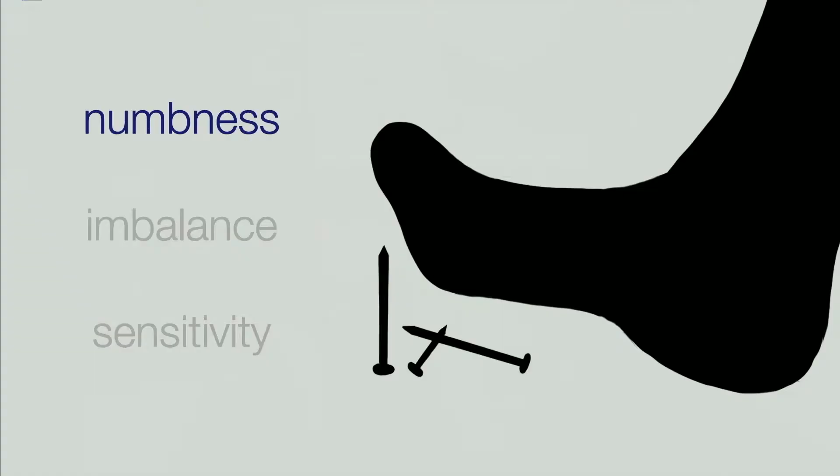Well, for those with peripheral neuropathy, they're having a much different sensation. Peripheral neuropathy is caused by nerve damage in the extremities of the body. Often starting at the tips of your toes, it works its way throughout the foot, often causing numbing, pain, and weakness. Because of this loss of sensation, people with peripheral neuropathy have to be extremely careful, whether it's accidentally stepping on something sharp and leading to infection, to misstepping and causing a fatal fall, and driving puts their lives and the lives of their loved ones in danger.

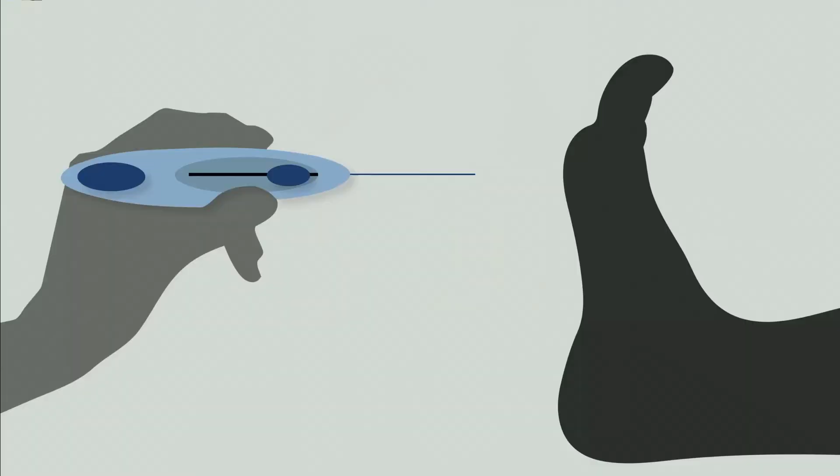We wanted to focus in on a subset of people with peripheral neuropathy, specifically those whose condition results from diabetes. In the United States, 13% of adults are diabetic, and of this group, half of them experience some form of peripheral neuropathy in their lifetime. Thankfully, doctors have a variety of ways to test for peripheral neuropathy, one of which is the Semmes-Weinstein test. This test is done by having the doctor poke different locations on the patient's foot and ask questions, helping the doctor determine how much sensation the patient still has.

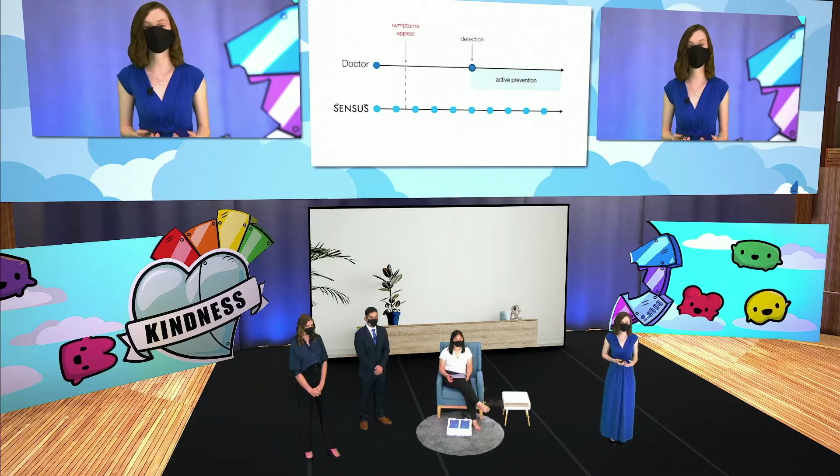But what happens if the symptoms appear much earlier than their next doctor's appointment? By that time, detection is far too late and there's been significant nerve damage. That's why we wanted to design a product that causes early detection and early active prevention. That's why we designed Sensus. Sensus automates the peripheral neuropathy screening process by testing 5 points on a patient's foot. We chose these points strategically because they represent the progression of PN over time. PN starts at the tip of a patient's foot and gradually makes its way down toward their heel.

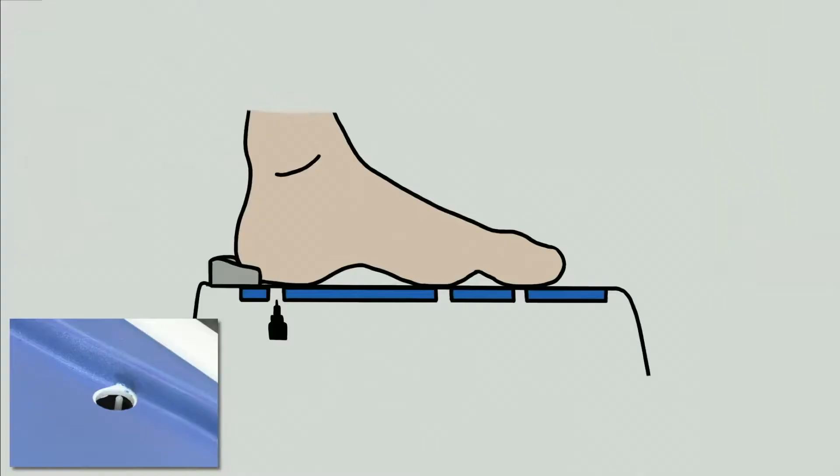Now, let's see Sensus in action. We'll conduct an abbreviated test with Jenny, who is here today representing our user, a diabetic at risk for peripheral neuropathy. Let's get started. Jenny will place her feet on Sensus. Sensus will automatically detect when Jenny's feet are in position, and that grayed out begin button will turn blue. Sensus starts with Jenny's right foot. The filament corresponding to her heel will rise and tap her foot, mirroring the Semmes-Weinstein test. Because Jenny still feels sensation in her right foot, she'll answer yes.

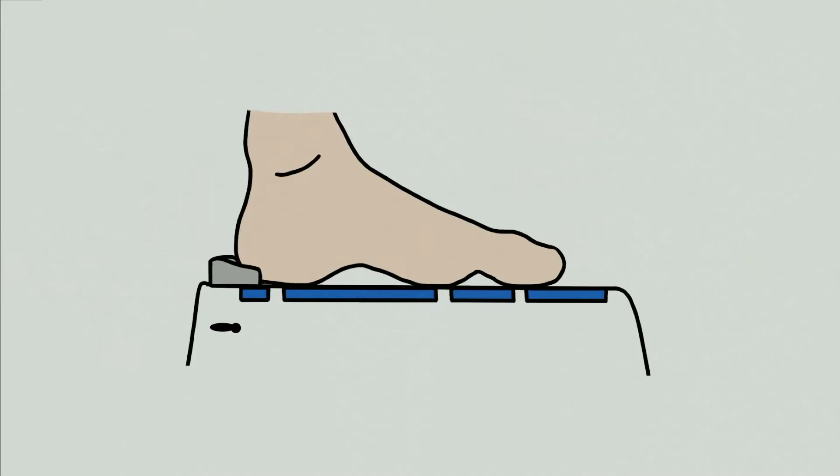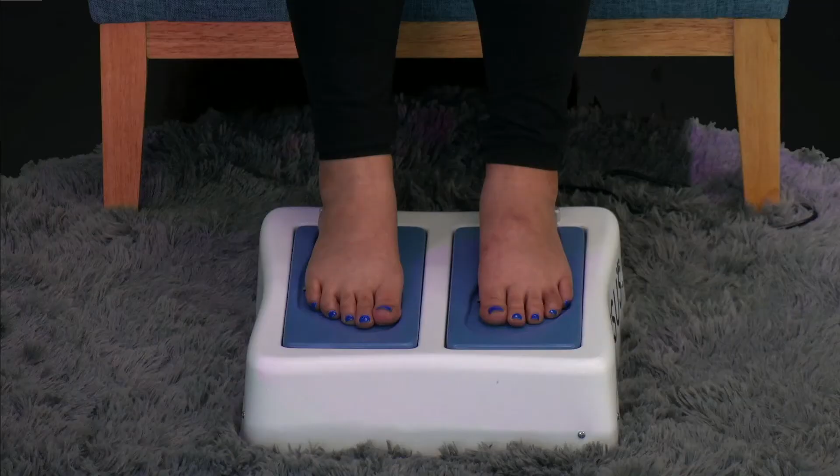Sensus will now repeat the test at the same location, except this time it'll perform a fake test. Fake tests are used by doctors to determine when a patient can and cannot feel a tap on their foot. In our case, a fake test mimics the sound of a real test, except this time it doesn't tap the user's foot. Because Jenny didn't feel a tap during the fake test, she'll answer no. Sensus now moves on to Jenny's left foot, where unfortunately she's experiencing symptoms of PN. Sensus will tap her foot, but this time Jenny won't feel it. She'll answer no.

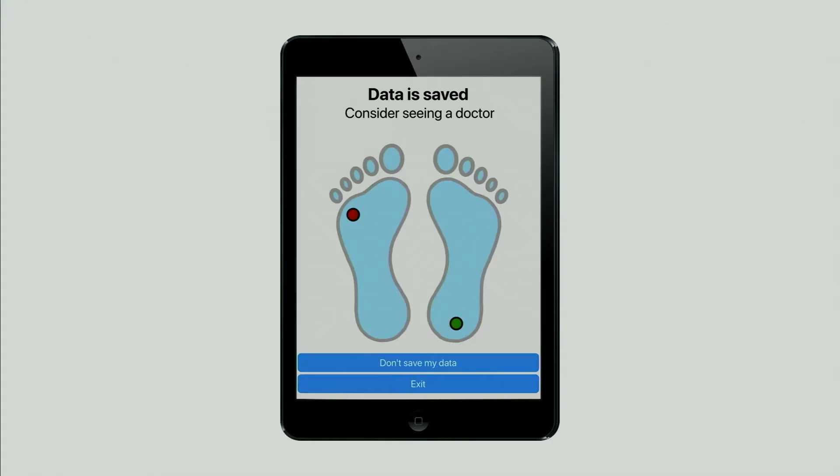At the end of the test, Jenny will see her results. The green dot means that Jenny feels sensation in her right heel, whereas the red dot means that Jenny may have lost sensation in the ball of her left foot. Because Jenny didn't get a perfect score, Sensus recommends that she see a doctor. If Jenny ever wants to see this or a previous test again, she can do so in the app as well. And it's that easy. Thank you, Jenny, for representing our user.

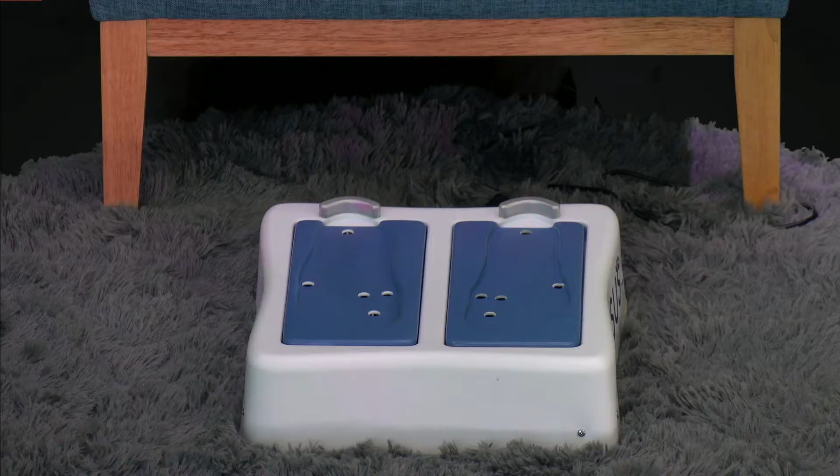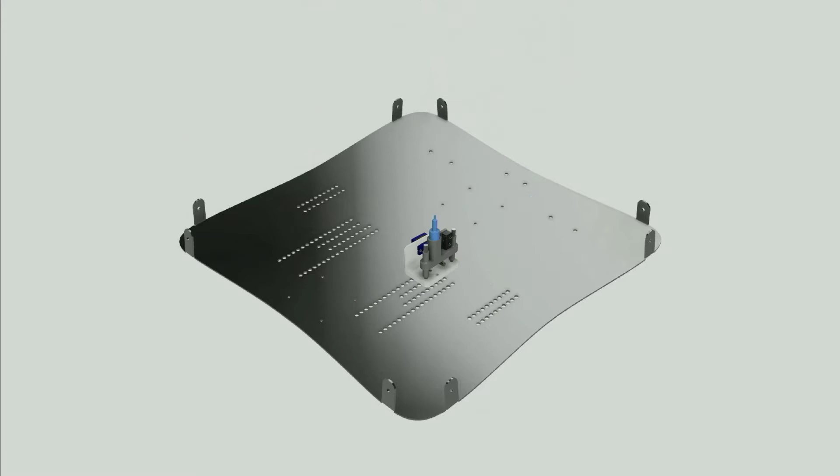When a user begins the test, they position their feet using the metal aligners. A capacitive sensor recognizes the heel and turns Sensus on. This keeps the entire experience on the app, so the user does not have to bend over to turn Sensus on. The customizable foot inserts are interchangeable, so Sensus can be manufactured to fit almost anyone and ensures their feet are tested in the correct points. Let's take a look under the hood. Our base plate has 10 filament modules, with 5 per side, capturing the most pressure-intensive parts of the foot. Each module uses a crank rocker system. This system consists of the crank rocker, a sliding platform, a limit switch, and a filament piece. We chose this system for its compact height, relative precision, and a quick speed for rapid testing.

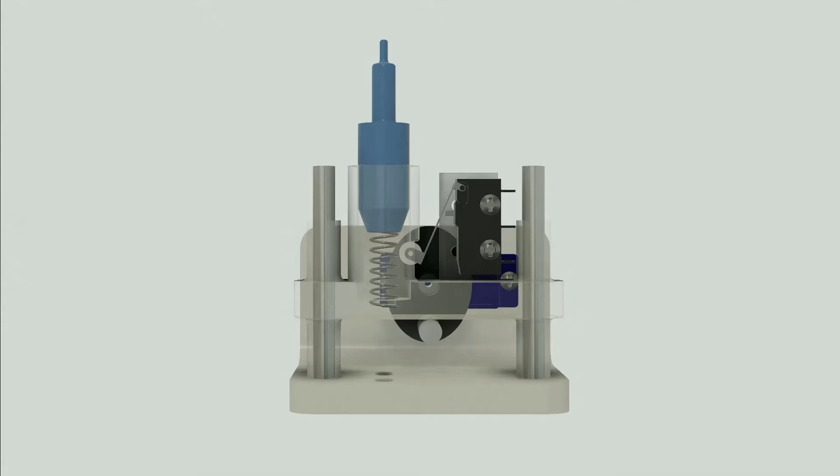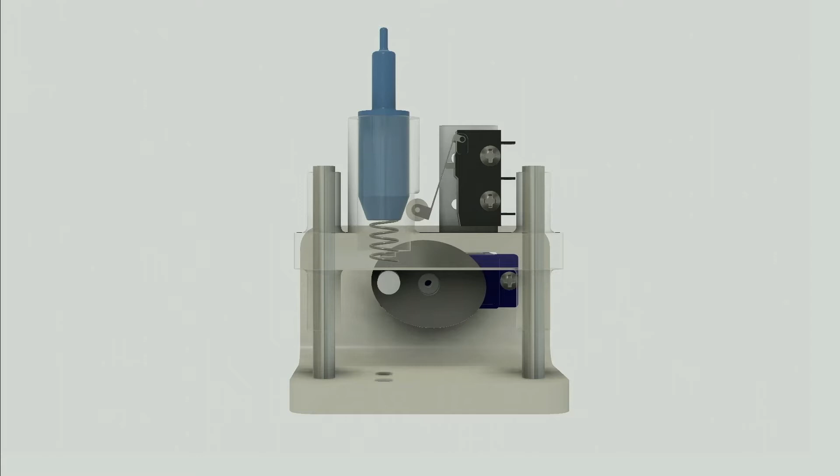Now, let's get it moving. When a test begins, the motor rotates the crank, and the attached peg provides an upward force on the sliding platform, transparent here, moving the filament piece closer to the foot. When it reaches the foot, the piece comes down and the spring is compressed, pushing in the limit switch and triggering it. This signals that the foot has been tapped with sufficient force. In turn, the crank rocker reverses its motion, bringing the sliding platform and the filament piece down to its original height to fit within the casing.

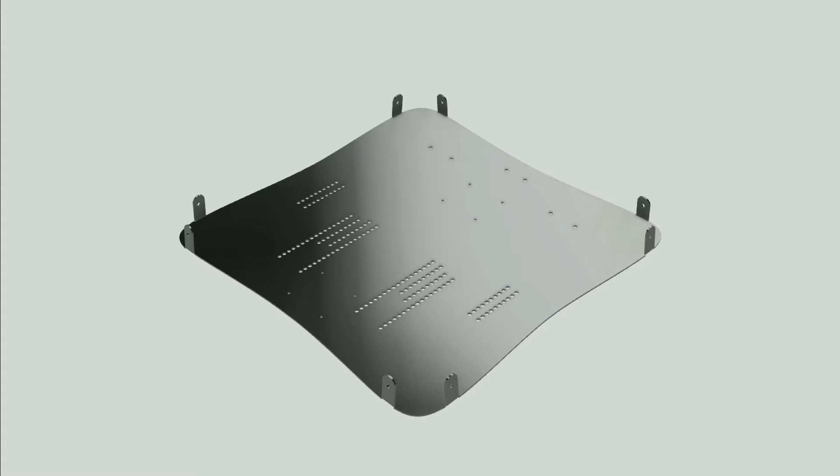We didn't stop there. One of our biggest challenges was balancing adjustability for different foot sizes with compactness. To address this, we've created a base plate with holes for a wide range of shoe sizes, ensuring a variety of patients can screen for peripheral neuropathy in the comfort of their own home. All of this is housed in a sleek thermoform casing designed to seamlessly fit into any home environment.

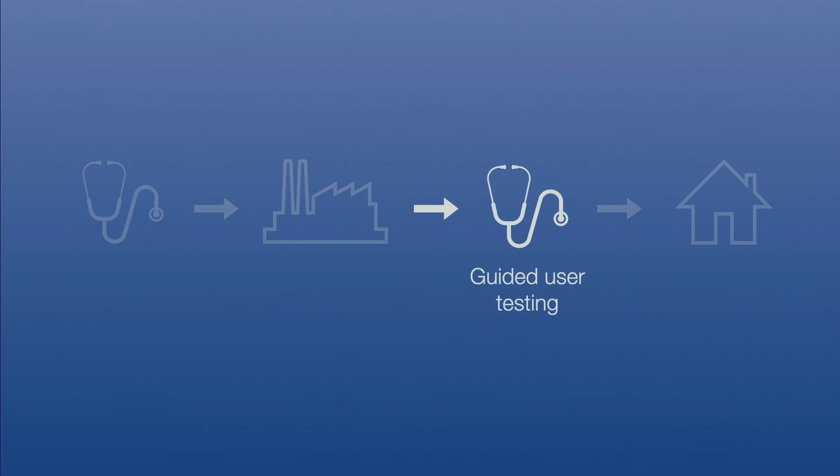We wanted to make Sensus as easily accessible for our users as possible. To do this, we started the process when a doctor recommends that a patient screen more regularly with our product. As soon as this happens, a Sensus is customized and manufactured for our user. After that, it's as simple as the doctor teaching the patient how to do at-home testing, and then the patient is able to take Sensus home for personal use.

We have split the cost of our Sensus product down into 4 different components: SG&A, R&D, manufacturing, and profit. As a result, Sensus costs $200 to the user.

And we have pretty big aspirations. When it comes to actually selling our product, we're looking to focus in New England for the first 2 to 3 years. But beyond that, we're hoping to ship across the country. With Sensus, we believe that monitoring your health should not be limited to a doctor's office. Thank you.

Thank you, Blue Team. Hello! I am the BFG, the big, friendly guardian of design. It's a beautiful evening here in Kindtopia Court, and Blue Team, what a terrific, touching presentation. I certainly sensed your enthusiasm. I'm filamented with pride. So now, let's take the test.